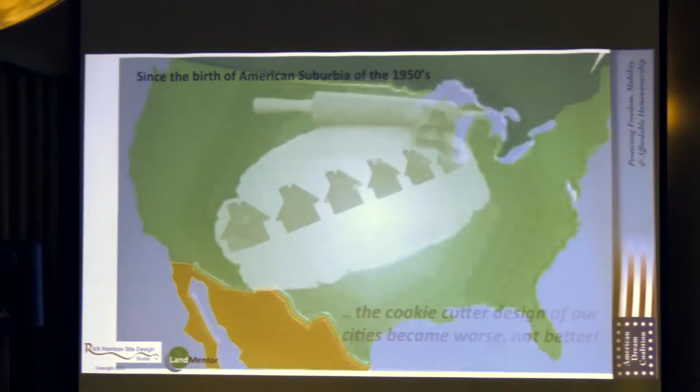Again, since the birth of the suburbs in the 1950s, we got this kind of cookie-cutter design. I started planning almost 45 years ago. Everything was done by hand. Since we had computers, computers now automate, and we depend too much on computers, and we started noticing that planning has gotten worse, not better. So in 1993, we established a planning firm to try to discover new methods. I had a software company that served engineers and land surveyors.

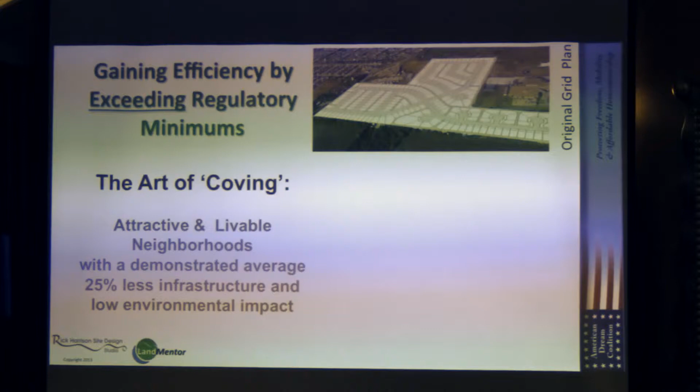And with that, the collection of methods that you'll see, just a Cliff Note version of it, we call Prefurbia, which is the title of our book, which is available back there. And the software, we're still in the software business, and that's Land Mentor. Our first discovery that got us attention was a method called coving. I just want to explain what that's about.

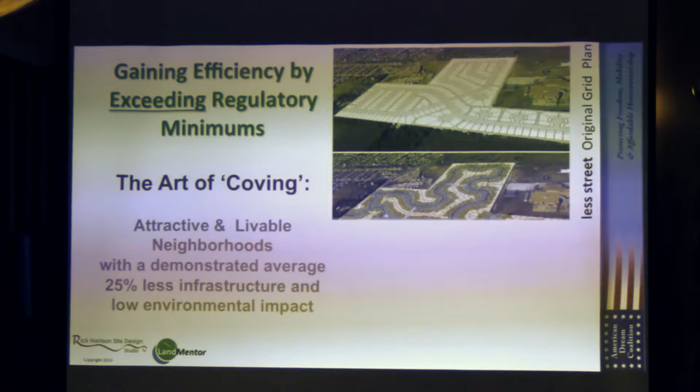When you traditionally look at land development, the person planning that development thinks their job is to fill that site up with stuff. That's what they're getting paid for. Inadvertently, they fill the site up with road. What coving does is significantly reduce the amount of road and keep the density. That's what coving does, and I want to explain a little bit on how it does that.

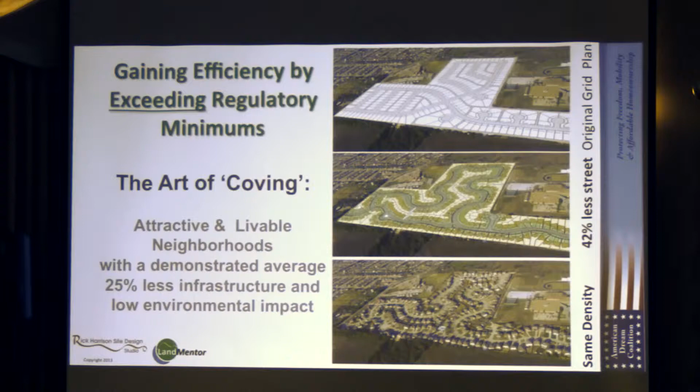We have a demonstrated average 25% reduction of infrastructure cost. When you reduce the road, you have more green space for people, and that's what suburban people want. They want space. They want a nice house that's unique, that's substantial. Before coving, those bubbles along corners exist all over the world. That's a $40,000 piece of pavement to serve those homes. Why does it exist? Anybody here know why? Frontage, right.

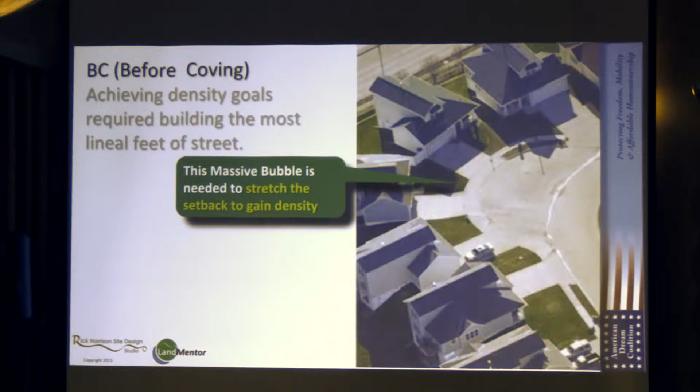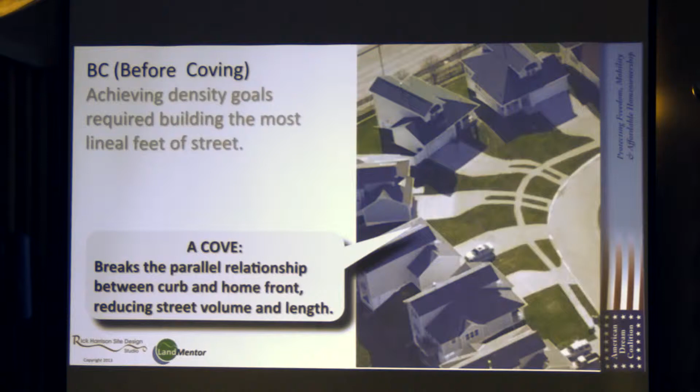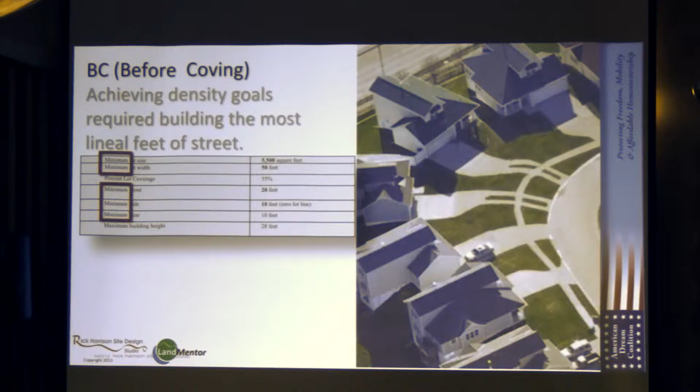So what happens is, in order to stretch that setback line, you read the ordinance, this is Omaha, it has a 20-foot deep front yard setback, so in order to get those homes in there, you must build a $40,000 piece of pavement. But the ordinances never said that. The ordinances have this magic word minimum. You can go beyond the minimums. So it's the concept of exceeding the minimums to gain efficiency. That magic word exists in every ordinance around the world. So it's not the minimum dimension, it's the optimum dimension. It's this idea of separating what happens with the road and the home front.

Here's another thing, there's a big thing against cul-de-sacs, and depending if you're in Virginia or not, it's really big. What's the logic on the radius of a cul-de-sac? Anybody know? Fire truck. That's it, no other logic. And everybody goes to the absolute minimums on the cul-de-sac to create the fewest number of premium lots.

So what you've got is fewer premium lots, but if we make everything bigger, if we just spread everything further apart and make that street one way, because that's how you're going to drive around the street anyhow, you actually get a ratio of pavement per home that's more efficient than an urban grid.

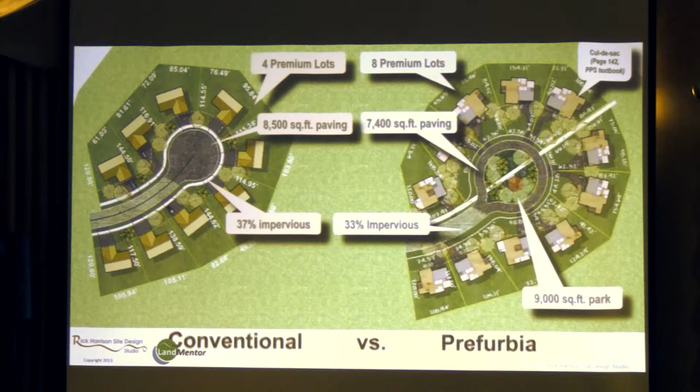You pick up a park in the middle. You extend that walk going through the rest of the neighborhood, make it wide enough for an emergency vehicle to travel on. Now you've taken away the argument that a cul-de-sac is a closed loop. If you do a good job of tapering the driveways, you reduce the impervious surface, and it's the exact same density. You've given up nothing. So it's only a gain.

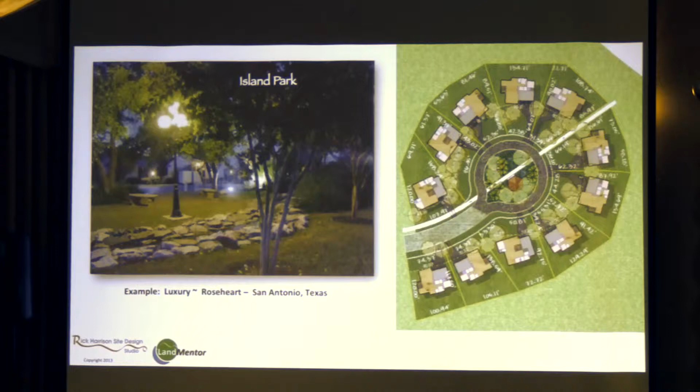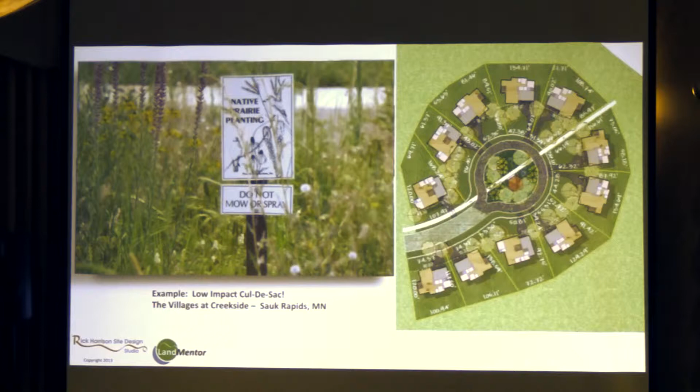This is an example of using the right dimension. Who wouldn't want to live in front of the park over there, or who wouldn't want to use the drainage on a development, low impact, and just eliminate the curb and just have one inlet? So you take a negative and make it a positive.

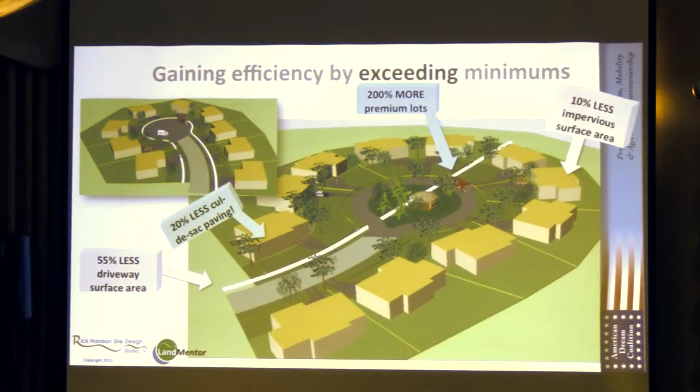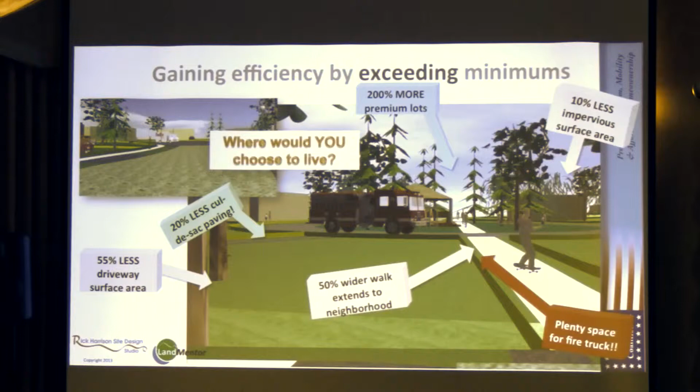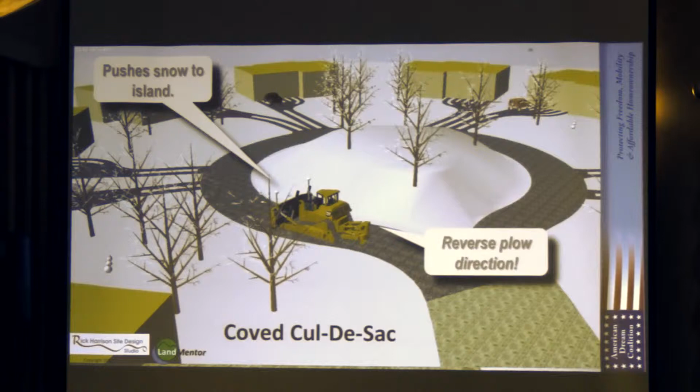And not only that, you have increased that premium for the cul-de-sac considerably more, and you could build less cul-de-sacs, which means it's more efficient because you don't have a lot of these streets leading to the cul-de-sac. The big thing is, where would you rather live? For snow removal, instead of going on the outside, which is a real problem, you would go on the inside into the island. So it solves that problem. We're from Minneapolis, and that's a big problem with snow.

But the key thing is, at any income level, instead of looking 100 or 110 or 120 foot right across at your neighbor, the line of sight within the home is considerably greater. So not only does it feel a lot less dense as you go down the neighborhood, and that's what people move to the suburbs for. They move to the suburbs so that they can get away from the density of the city and have that place for their own. So not only does it feel less dense without losing density, but when you're in the home, if you plan this right, you have much better views.

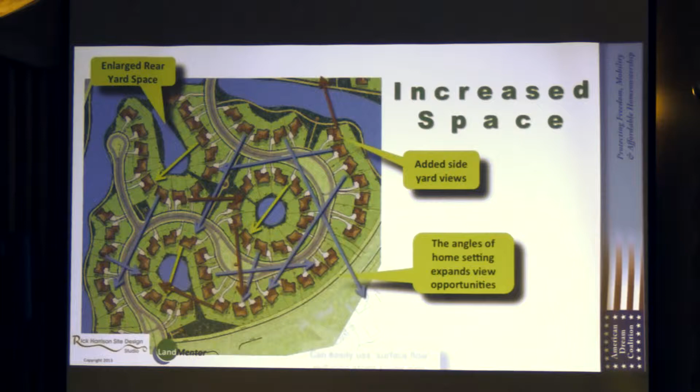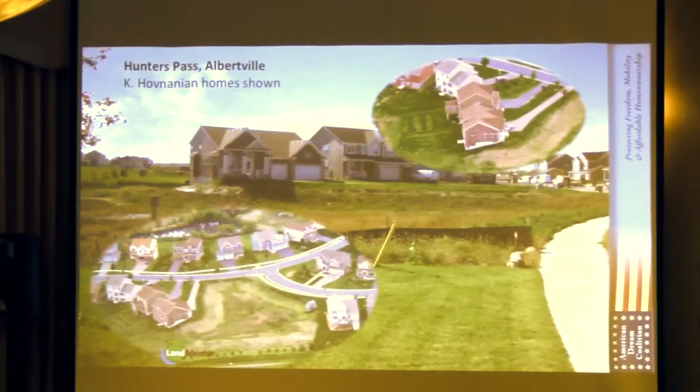This is a flare where the homes leave the street entirely. You have a lot longer driveway. But this home has views around this home, and each one of these homes, if you can see those side windows, that means that side window gets a view of space. So they actually coordinated the living space and windows to what was happening to the homes. That's why the home sold so fast. It's an attention to detail. And then as you go down the street, there's this huge amount of space, and otherwise these wetlands and ponding areas would be hidden from view.

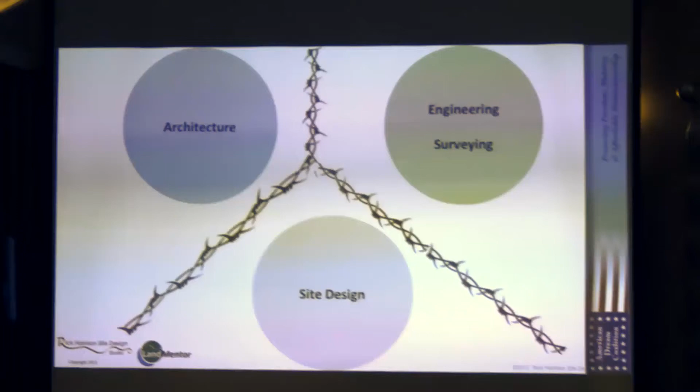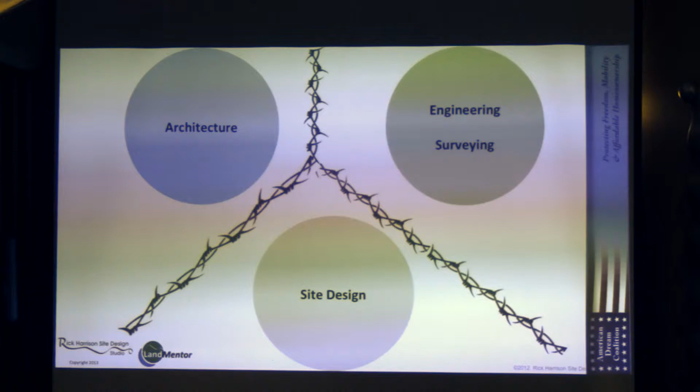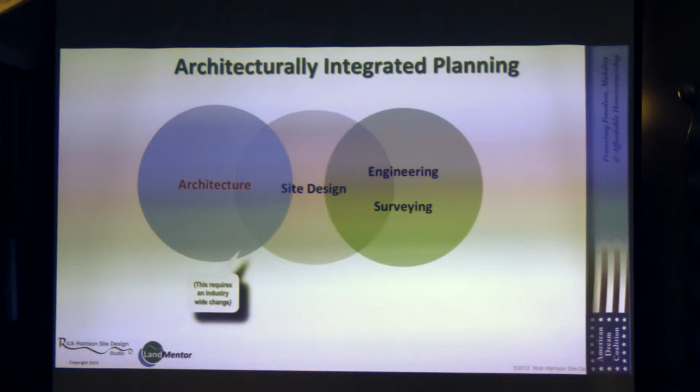Here's a problem. Initial design of a site. There isn't a single university that we have found in the U.S. that teaches urban planning, engineering, architecture, where all the students work on the same project. Not one. This is the way the industry works. So in order to create sustainable growth, we have to turn the industry to work like this at the initial design stages. And that's something that we're working on in our attempts to improve the world.

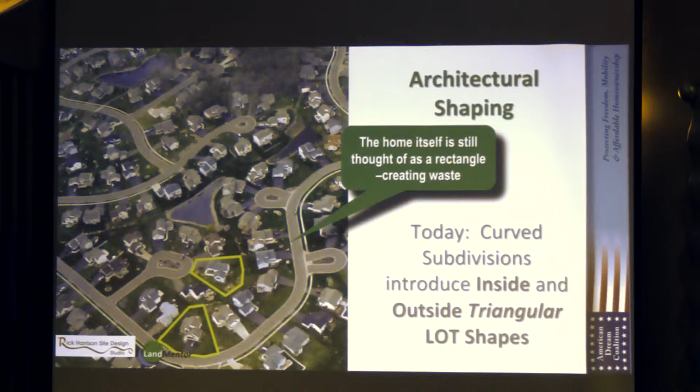Architectural shaping, what does that mean? Until the 50s, all homes were a rectangle on a rectangle. With the birth of the suburbs, you had two new shapes, outside pie shape, inside pie shape. Yet every surveyor, engineer will look at that home as only a rectangle. And they don't even look at the home until that's the last thing that they look at.

But in the pursuit of density, that's a brand new development in Fargo. That's a worst case scenario. You can't get much narrower than that. In the pursuit of density, homes get narrower. They get narrower, they get deeper. So if they get deeper, what happens is you lose your window space looking at your quality views and you're looking right into the neighbor. So that's the problem with urban densities in the suburbs.

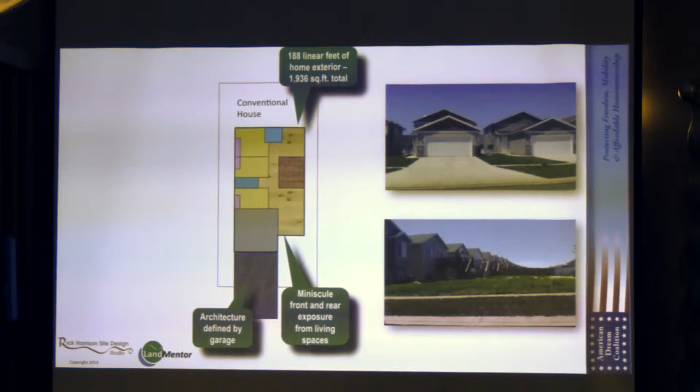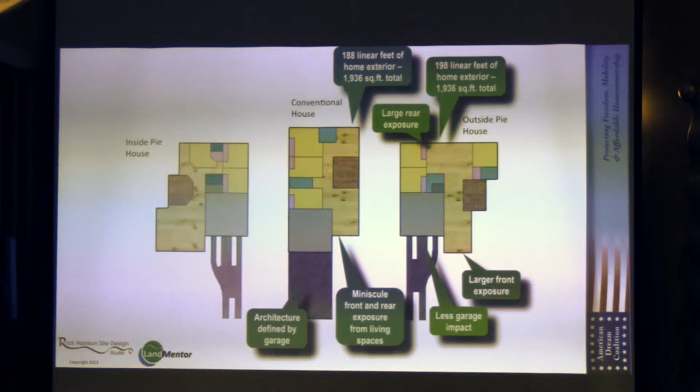What if that development, though, had curved streets or coved lots? What you can do is use that side yard we've always been able to use on the inside or outside of that curve. And we've always been able to use that. We're not breaking a single regulation that exists in any of these solutions. That's the beauty of it. We're not asking for anything. Anyhow, and now you've got a much more sellable and livable home.

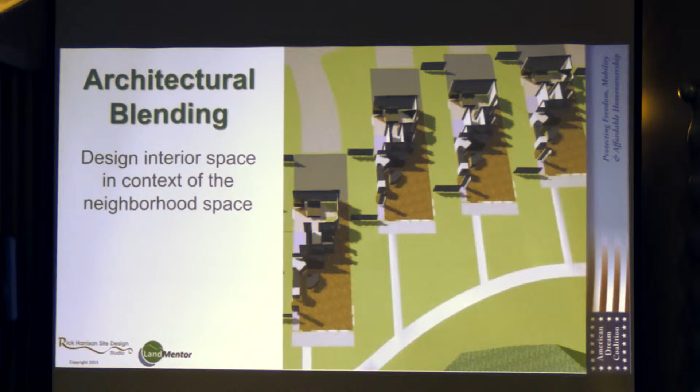We're talking about livability. We talked about greenhouse gases and all that stuff. Let's start talking about livability and value, quality of life. These were what we call bay homes. When people plan neighborhoods, you see little rooftops, things like that. But let's pay attention. We got the technology to pay attention to what happens inside the home and how does that relate to views outside the home. So we did about 8,000 of these over the years before the recession stopped everything.

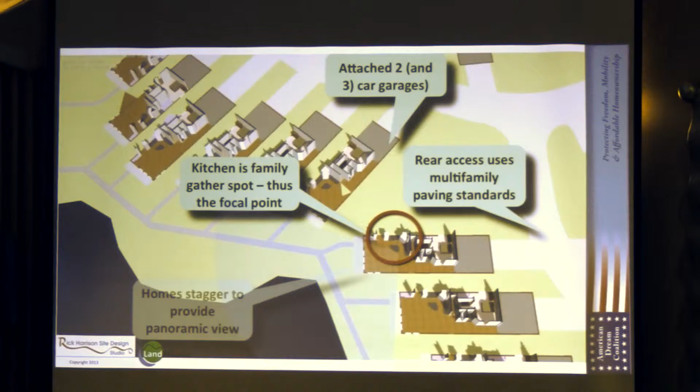But with the bay home, I'll explain it. The reason it was called a bay home was the open spaces had a bay-like shape. But we use multifamily standards. We go multifamily zoning. We just detach the homes. So people would rather have their own home than attached. And the key thing is, in the U.S., people hang out in the kitchen, so we want an open floor plan from the kitchen to get a panoramic view so you don't look at your neighbor and you think you're in a low-density home.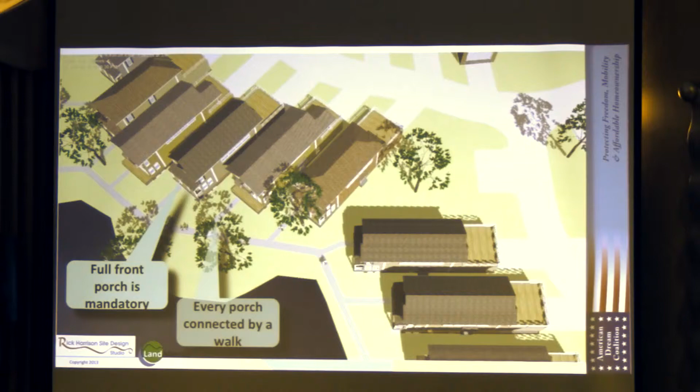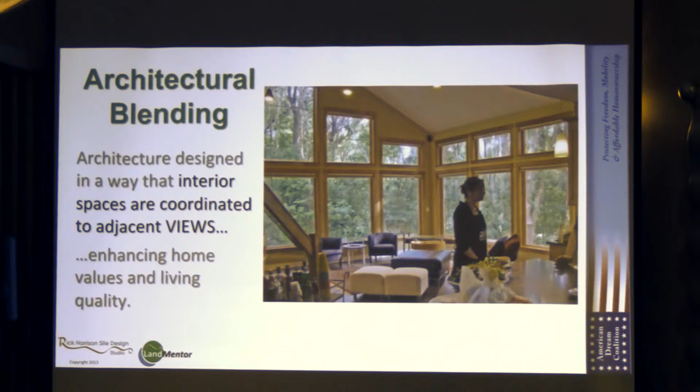These things tend to look like new urban homes. We like to have a full front porch. There's certain values in new urbanism that actually do work, and we like to have walks connecting the neighborhoods. And they're a nice-looking home. Very easy to plat. So with architectural blending in the bay homes, we were thinking, why not every home? Because you could buy a Pulte or Toll Brothers or whatever home, and they don't connect the spaces together. But what would happen to the quality of living if you did at any income scale? So I'm talking about low and high income. You're improving the quality of life and you're improving the living experience.

Just real quick, how much time do I have? Let's see. I'm good? Oops. Your phone just broke. Yeah. That's all right. Okay, another 10 minutes.

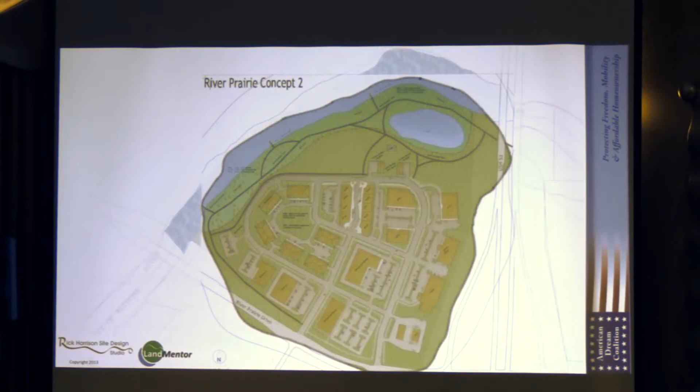Case studies. This is Altoona, Wisconsin's town center. They hired us after they saw one of the plans that we submitted. This is what they were going to approve. After all these new urban, sense of place, and all these documents and all these meetings, this is what they had approved for their town center. So that's new urbanism. When we look at the plan, we put it through our technology so we can actually run the numbers. And we get a nice 3D view of it, which no one saw a 3D view of what that will really look like.

Look at the parking. Why? Look at that. This is from an engineering firm. A 200-man engineering firm produced this plan. You have very little parking, but tons of pavement. You park, it doesn't make any sense. Why wouldn't you park on the other side of that piece of pavement and triple the amount of parking? Is it because cars are evil and we're supposed to walk? This is Altoona, Wisconsin. It gets like snow in winter.

So we got a job to redesign it. First thing in redesigning or designing any neighborhood, I don't care if it's a town center or residential, draw the walks first. You cannot create a walkable neighborhood until you design the walks first. If you design the walks later, it will not be walkable because the streets and the walking should be two different patterns.

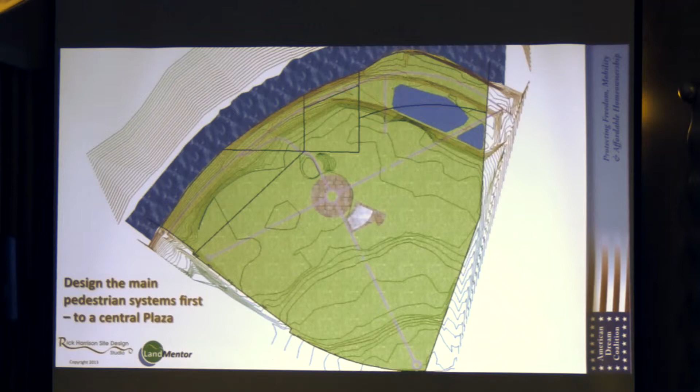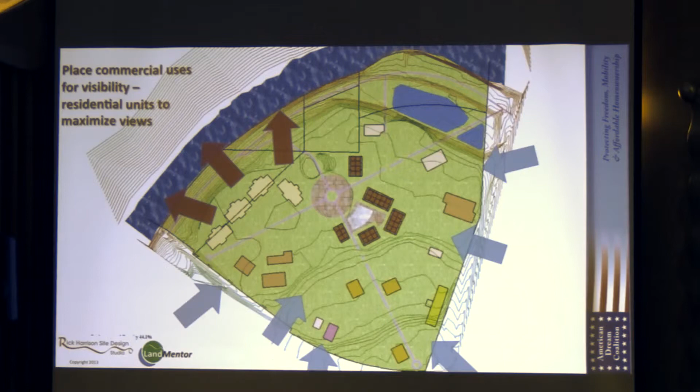So we created a plaza, a town center on this, and then as we put in the uses, you want to know what those uses are as you drive down the perimeter. Oh, there's actually a center of this. I could see it. Let me drive into this thing. And also, again, the views on the condos. You want to maximize the number of units that have a good view.

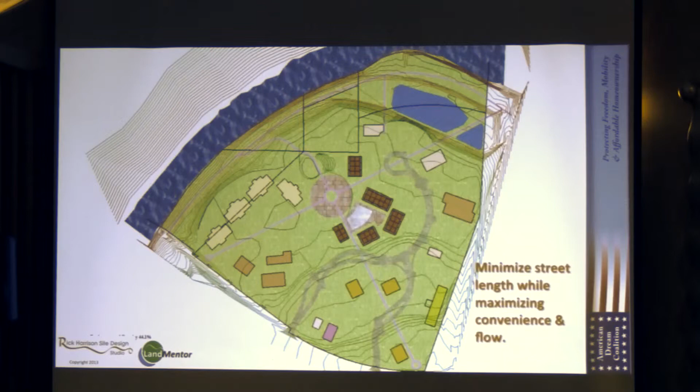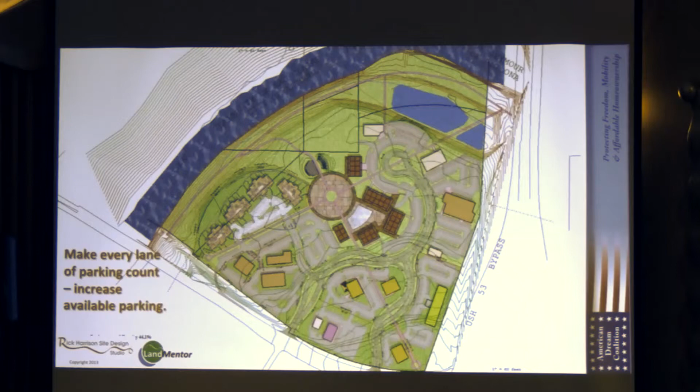Use the least amount of pavement possible to get to where you want to go. Streets are your evil thing. Just the least amount of linear foot of street. And with that, we had considerably more parked cars with the exact same impervious surface coverage. So you have a much more functional and attractive town center. In this case, it didn't cost less, because our typical development's about 25% less infrastructure cost, but this is different. We want to create function.

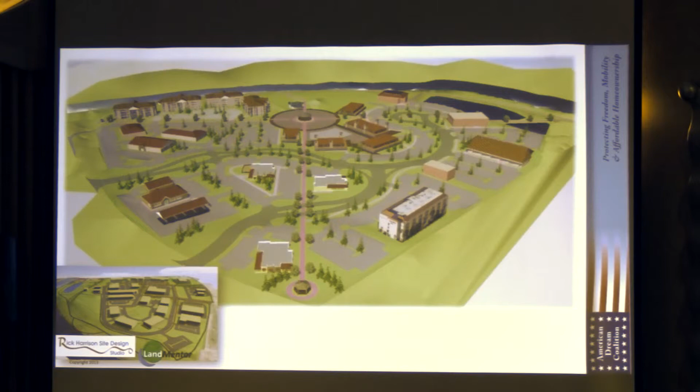Here's another one. This is Colorado Springs area military housing. Developer, you know, this is not upper end housing. This is the military families. And can anybody tell me where the waste is in that design? Anybody?

Let me show you. This street from here to here, there's no frontage on half that street. Here to here, no frontage on half that street. No frontage on half that street. When you start adding all this up, there's about 40% of the street that's not fully fronted. That's at $300 a linear foot. That is a tremendous amount of impact and money.

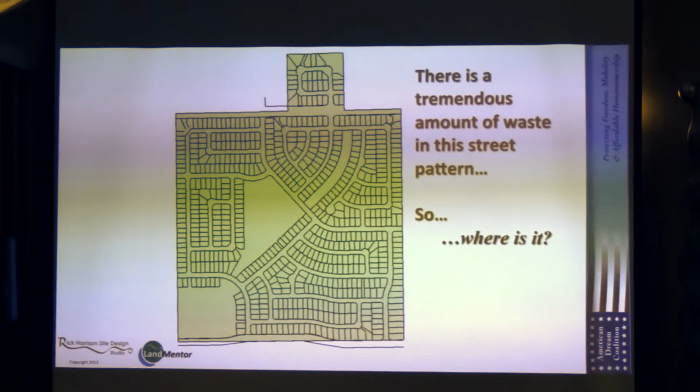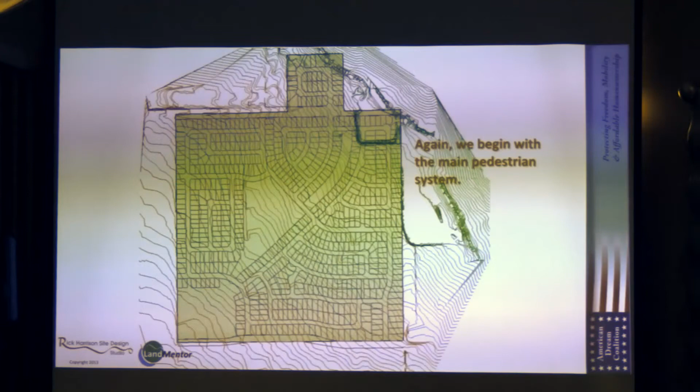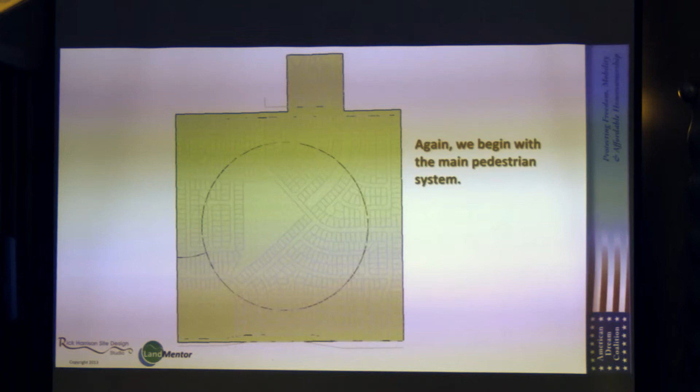So again, when we start looking at a CAD-based world where they're using offsets and automated lots, it doesn't necessarily follow the topography. So the first thing we do, again, figure out how we're going to walk around the neighborhood. The walking highway systems, that's that 10-foot wide trail that connects the neighborhood. And then design a street pattern that will get you home with one turn or less to minimize time and energy as you go through the neighborhood.

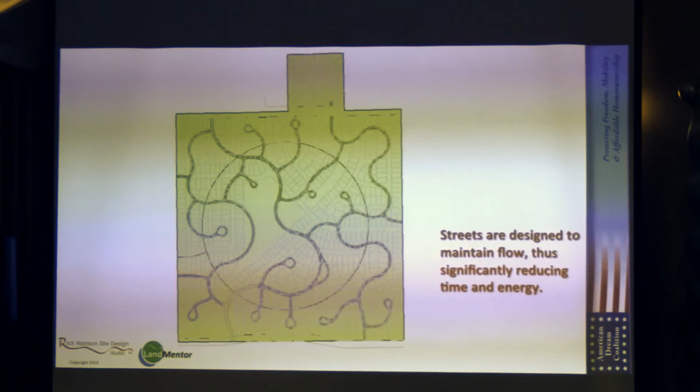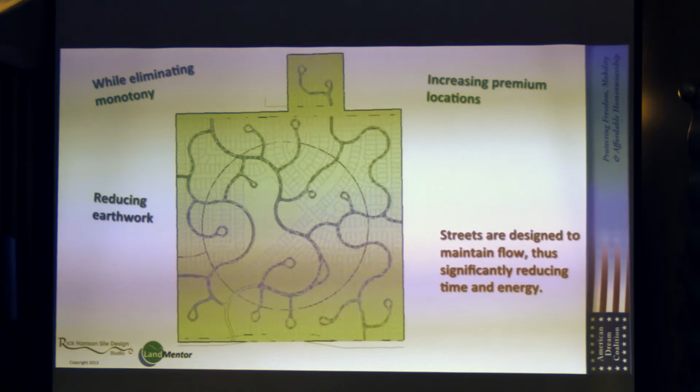There's no monotony on here because there's no two places that are alike. So we're eliminating a lot of problems. We are putting meandering walks along the sides of the streets. And you end up with a neighborhood that's more like a piece of art to live in, that's much lower cost to develop than what they were going to develop. So what do you do with all that money? That's what paid for that 10-foot wide trail.

That's what pays for better landscaping, better architecture, and that's what pays for more efficient housing as far as energy use. So what we're wanting to do is take those funds that were saved that you would have put in dirt and put it into higher end housing at any price point. Again, the average coved development saves 25%. This was 29.9%.

Do you want to hand me my little notes there? The notes, the piece of paper. Yeah. All right. Just wanted to make a couple points.

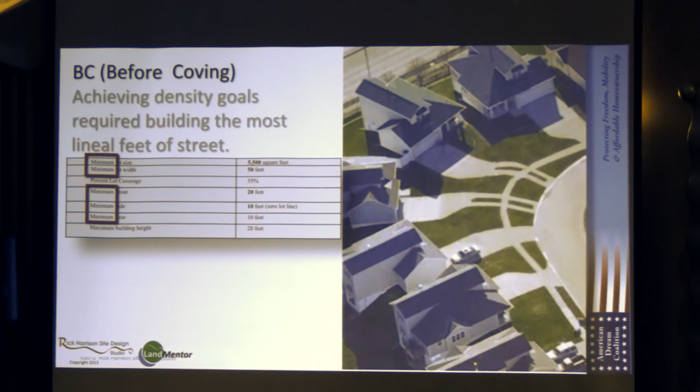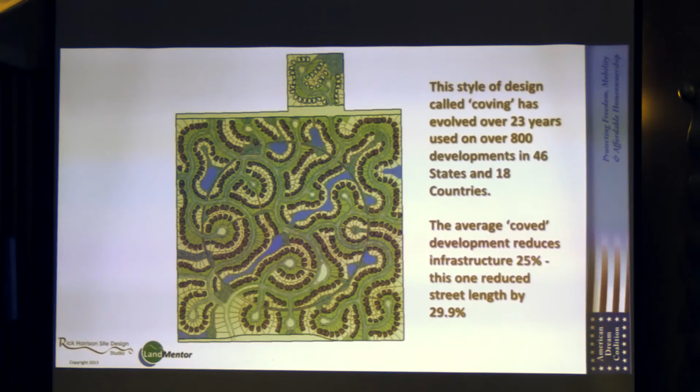When we work on new methods and new technologies, and this has been a 23-year process, the main thing is livability issues and come up with an idea that does not increase costs. So there's a lot of parallels with new urbanism. We want walkability, we want attractive neighborhoods, but new urbanism, when you go on the Congress of New Urbanism website, they boast about gentrification. Gentrification is not affordable unless someone subsidized it, unless you people paid for it.

Gentrification, what happened to all those poor minority families that lived in the gentrification? Where's the articles that say what's the quality of their life? You know, what's the improvement? It's not good for the poor. It doesn't do anything for them. They're brushed aside, maybe into the suburbs.

What's interesting is we have 300 developer clients that have essentially financed everything. In the 23 years we tried to talk with government, the only politician that's helped us has been Al Franken. In 23 years, one politician. And he got us approved at the regional planning grants of HUD just when they dried out. There was a $300 million grant option.

Because the Sustainable Communities Initiative has realized that pushing new urbanism in these suburban areas is not effective. You could push it all you want. You're not going to convince these people to put people in high rises when they live 30 miles out of the city. So we had a viable solution, but we never really did anything with it because we were just in time in 2010 for those grants to disappear. But that's basically a cliff note of the presentation.